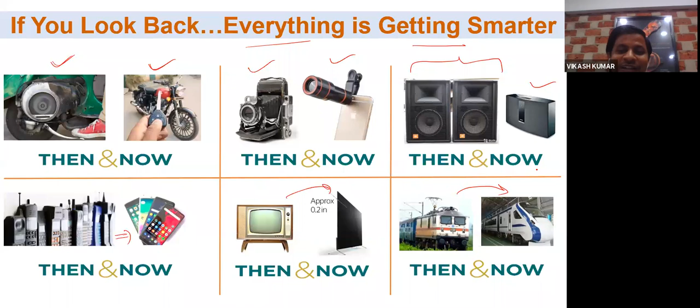So when we talk about everything getting smart, why do we always forget to talk about our industries? If we talk about manufacturing, nowadays manufacturing is not only manufacturing, it is now also known as smart manufacturing. Earlier we were doing only manufacturing with our plants. Now we are trying to do smart manufacturing so that maximum variety can be produced with the same capacity, with the same area. So when we talk about smart manufacturing, it is none other than Industry 4.0.

For that, we have to work. So we started our journey from Industry 1.0, where water and steam power gave very major changes to industry. In the second Industrial Revolution, we have electricity, and people thought about mass production because of this electricity.

When we talk about Industrial Revolution 3, basically automation came into picture. With the help of electrical and electronics, we achieved good automation. Now, if we talk about today's revolution, that belongs to Industrial Revolution 4, which is having one step beyond automation.

When I say beyond automation, it means we first have to go with automation, then we can manage all the things by basically merging our physical world with the virtual world with the help of different technologies. One of the technologies you must have heard of is IoT or IIoT, Industrial Internet of Things. This is one element of Industry 4.0.

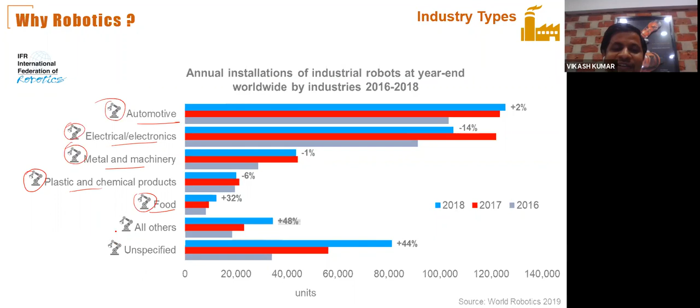There are so many other technologies that are going to play a major role under this. Now, when we talk about robots, you can find these robots present everywhere. If you talk about automotive industry, electrical industry, metal industry, plastic, food, any industry—if you see a picture of any industry, you can easily identify good numbers of robot units installed.

So if I have to cover this Industrial Revolution 4, under smart manufacturing you can find one major technology we have to focus on: robots. Then other technologies are Internet of Things, simulation, cyber security, system integration, cloud computing, 3D printing, big data management, and augmented reality. These are a few of the technologies.

If every industry focuses on all these key elements, all these key technologies, that means we are easily going to upgrade our technologies or industry from 3.0 to 4.0. This is the basic thing we have to work upon in the future. These are some of the latest trends and technologies you have to learn so that our industry can benefit from all these things.

Now come to your opinion. I have covered around 5-6 slides. With the help of these slides, what I've covered—can you say robotics is still a choice for us, or is it a need? If you talk about 5-10 years earlier, I can say at that time robotics was a choice. But nowadays, it is a need.

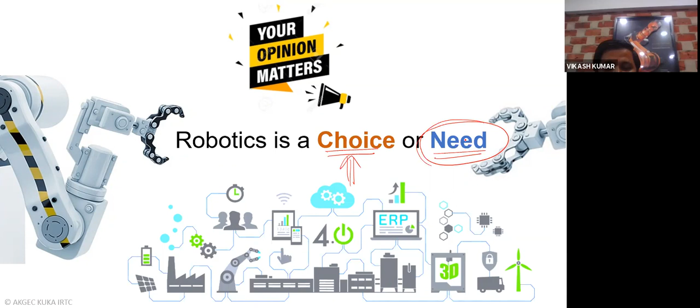You cannot compromise with these robots. Whether you are doing anything, any small thing or any big thing—if you are in production, if you are in inspection, if you are in assembly—you have to use these robotics things. So now I can strongly say robot is a need, it is not a choice for us. We must learn all the in-depth knowledge of these things. So today's session I have planned on robotics.

And if you see the current scenario, this coronavirus pandemic has impacted our manufacturing industry a lot. Here you can say the first impact is on the economy—it goes down. Under coronavirus guidelines, we have to follow this social distancing thing in our production lines.

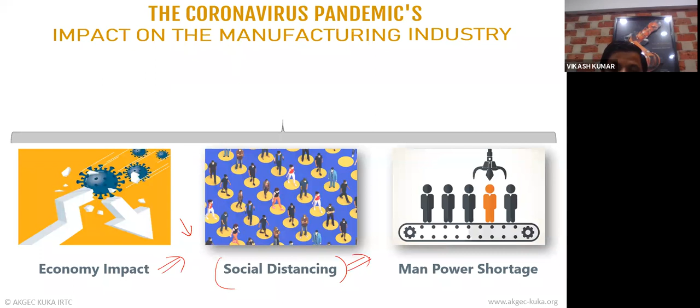Also, we are running into a sort of manpower shortage because every laborer has moved to their native places. So if we have to overcome these three problems—suppose we want to raise our economy, suppose we have to follow this social distancing thing, and suppose we don't want to compromise with manpower or production—there is one solution you can offer to your industry, and that is nothing but a robot, because for machines there is no social distancing kind of thing. And again, machines can replace man up to a certain percentage.

So here you don't have to worry about labor. If you are going with some robotic system in your organization, it will definitely improve your quality and also your production rate. And it is going to increase the graph of your economy.

So these are the few things that you must remember. It is a very growing field. We have to adopt this technology in the coming 5 years, 10 years time.

And why do we go for robotics? There are a few major benefits that it offers. The first and most important benefit that robot can offer is repeatability. If you have to do repeatable tasks, suppose I have to assemble any engine, suppose I have to shift one object from one place to another for an 8 hour shift, for a human being it can be a boring job. But if you are placing a robot at that particular place, it can be easily done.

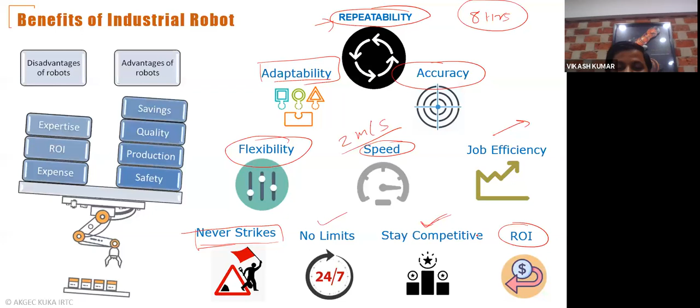And it also offers good ROI, return of investment. Robots are costly, no doubt. But if you are planning robots for your industry for the next 3 years, or if you calculate for the next 5 years your ROI, it has good figures. So you can have better ROI with this robotic arm.

So you have to work with these basic 3 elements. The first element is input - you have to work with sensors so that you can get proper input or feedback. You also have to work with a controller, this is the second element. And you have to work with actuating devices - that can be hydraulics, pneumatic, or electrical. Worldwide, if you see any automation, you can find systems are either hydraulics, pneumatics, or electrical based.

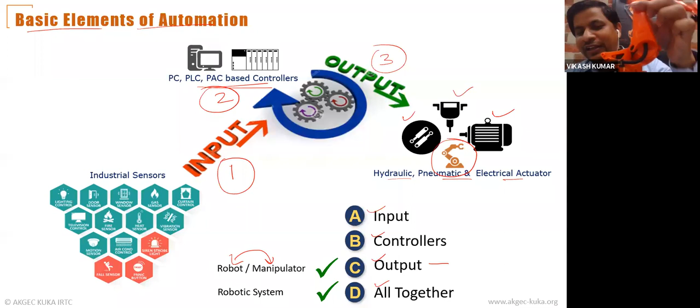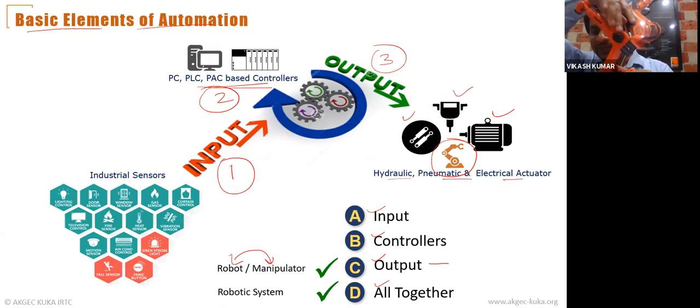If you observe this robot closely, it has some mechanical structure. This whole body, you can say it has some mechanical arrangement. But how am I going to move this particular joint, how am I going to achieve this motion? So I have to place some motor here. Suppose I want to move this particular joint, I require this particular motor. Suppose I want to move this point, so we require some motor at this end. So for each and every axis movement, we require motors. Here you can see, if you just focus on my slide, I'm just giving you an idea.

So basically a robot or manipulator can be electromechanical. We are using electrical principles, motor principles to move our joints. So most of the time robots have this electrical actuation. When we talk only about robot, it can be fit into the output end because it is having some actuation system. But when we talk about the whole robotic system, that is different.

When you are going to purchase this robot, you will get this robotic arm. When you are going to purchase a robotic system, that means you are going to get a few more things. Few more things means the robot will come with their controllers, with their teach pendants. So these are the things that you will get while you are going to purchase your robot system.

So robot is basically giving you some input device with the help of the teach pendant. Control means the robot has its own controller, like KR C2, KR C4 are the series names. For output, you are using some electromechanical actuators. For joint movement, we are using electrical motors. So when this question comes to you, like how we can fit robots - robot can be fitted into the output end, but robotic system can be fitted into all ends together, like input, output, and control.

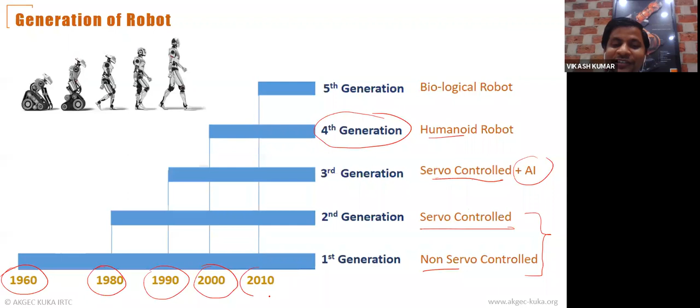When we talk about the fifth generation, worldwide researchers are working on that - biological robots. Biological robots are going to give you miniatures, like robots can produce robots. This is the basic principle. If a robot is producing its own clone, that can be considered a biological robot. So worldwide research is going on with this robot.

But when we talk about industrial robots, industrial robots majorly cover all these first three generations, where we can talk about non-servo or servo plus AI controlled robots. So today's session is basically based only on industrial robots.

And why we are always comparing any robot with human beings - because we have a few similarities. If you see a human being, they have bones for body structure. So for a robot, we have to do a mechanical structure. In human beings, muscles provide power. Suppose you have to move any joint, with the help of muscles only you can move. So in a robot, we are placing motors or hydraulic things or pneumatic things so that it can be actuated.

Humans have some senses, meaning they can sense certain things based on their body tissues. Tongue can sense the taste, nose can sense the smell. There are several things. With the help of that, we get some input. So that can be easily replaced with the help of some sensors.

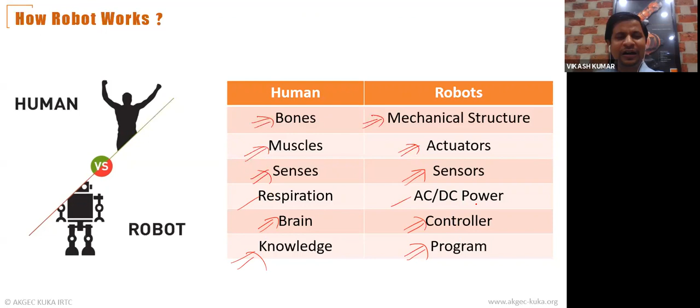Then respiration can be replaced by AC/DC power. Human brain can be replaced by the controller of the robot. Knowledge of humans can be easily put all together in the form of a program. So there are a few similarities you can find between robots and human beings, and because of that, we always compare these things with the robot.

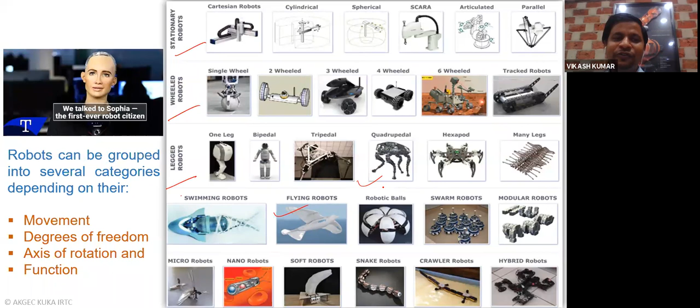So worldwide, if you see, there are some categories: stationary robots, wheeled robots, legged robots. All of you must have come across some robot - some have seen this particular flying bird-like robot. So everyone is well aware of all different types of robots. But if we properly classify this robot, what is a robot? First understand, a robot is a machine designed to execute certain tasks automatically with speed and precision.

If we are getting these things, then we can say that particular device is a robot. So here another definition is given: robots are computer coded software that enables the automation of repetitive rule-based processes, mimics interactions of users, and works across functions and applications.

These are a few basic definitions given by different people. But remember, you have to classify robots into two things: industrial robots and service robots. These are the two major fields that normally cover robot classification. Industrial robots, as the name says, are mostly used for industry. Service robots can be used for domestic uses or professional uses. When we talk about manufacturing robots, industrial robots can be used for manufacturing purposes or logistic handling purposes. So I think you have an idea about automated guided vehicles.

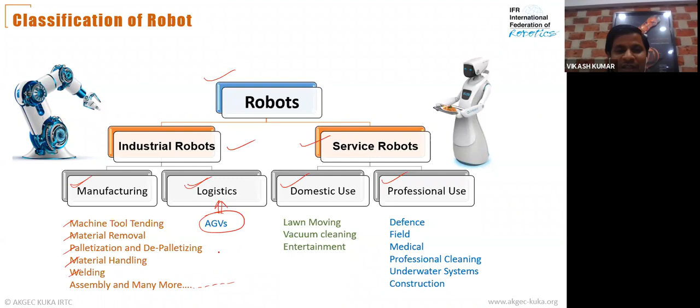That can be used for logistic management, and also we can use robotic arms. If we go for manufacturing industry, there's machine tending operation, material removal, palletizing, material handling, welding, assembly, and many more - many more meaning there is no limit. If you have any idea in your mind, you can easily implement that idea with a robot, because if you go with the robot definition, this is the standard definition that ISO gives.

Robot is automatically controlled, reprogrammable, multi-purpose manipulator. So manipulator is the standard term you must remember. In layman language, people always say this is a robot, but in scientific language, you always have to say this is a manipulator kind of thing. It has 3 or more axes.

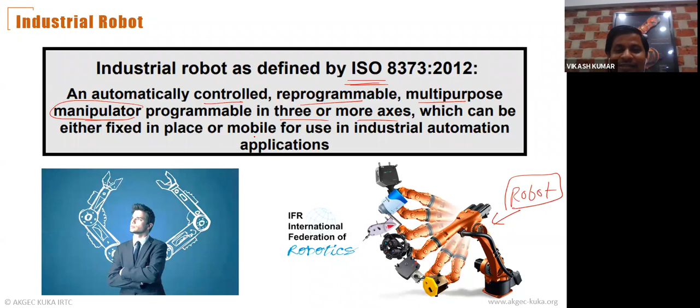If I summarize this definition, I can find these 4 terms. To qualify as a robot, a machine must be able to sense, if it has sensing ability - so I can call it a robot - if it can carry out different tasks, if it can reprogram, or if it has 3 or more axes.

3 or more axes means these axes can have either prismatic or revolute motion. Prismatic means always linear kind of motion, left to right. But when we talk about revolute, it means we are moving in degrees. So displacement is in mm for prismatic, and in case of revolute, we are moving in some degree, 100 degrees, 50 degrees, like that - our robotic arm, robotic joint is moving.

For defining any machine as a robot, if you find all these 4 qualities present under any machine, I can easily designate that particular machine as a robot. So it is very, very important.

So you just compare this robot with CNC. From the last 2 sessions, you are learning CNC in very depth. Now, can we say CNC is a robot? Because can CNC have 3 or more axes? Yes, it is applicable.

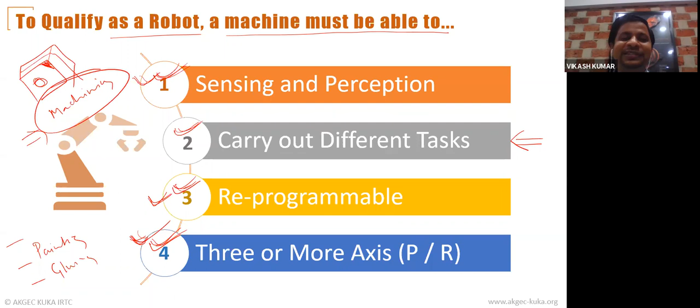If we have to change domain totally, the machining domain can be easily covered by this CNC, but other domains - painting, assembly, even inspection - cannot be covered by this CNC. So this is the main reason why we cannot say CNC is a robot, based on their multitasking property, which is not available with CNC. Thank you.

If you categorize your industrial robots, majorly people categorize them on the basis of geometry or structure, how robots look, or based on their control system. There are more than 10 types of classification available, but these two systems are very famous: classifying based on geometry or control system.

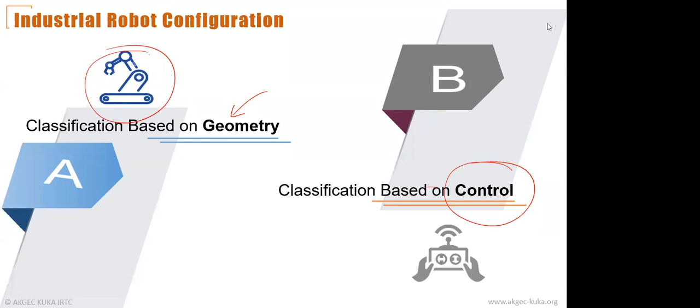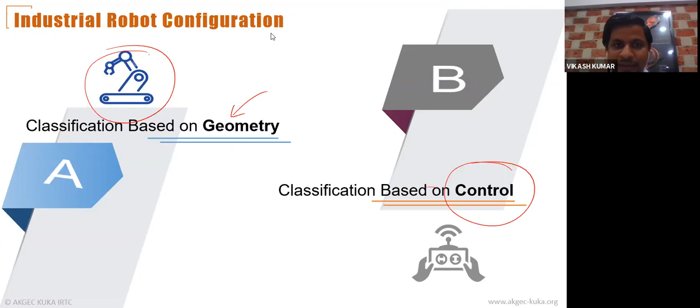So if we classify our robot based on geometry, I can have basically 5 kinds of robots. I can have Cartesian robot, which we also sometimes call linear or gantry robot, because all motions of these robots belong to linear motion. When we talk about jointed arm robot, that is the one I showed you in demonstration a few minutes before, that is the articulated one, having 6 degrees of freedom. It is also known as articulated robot. Robots can be cylindrical, spherical or polar, or SCARA robot. These 5 classifications of robots are very popular in industry environments.

When we talk about Cartesian robot, just focus on this. Cartesian, also sometimes known as rectangular robot, has all linear motion. So here linear, here linear, and here linear—all motions are linear.

When we talk about cylindrical robots, it has one rotary or revolute joint and the rest two linear. Here you can easily identify how the robotic arm is moving.

When we compare with spherical robots, spherical has 2 revolute joints—one rotation, second rotation—and the last one is linear.

When we talk about SCARA robot, double RP means 2 revolute and 1 linear. When we talk about jointed arm or articulated robot, it has all revolutes—this joint is rotating, and this joint is also rotating, so all together we get revolute motion.

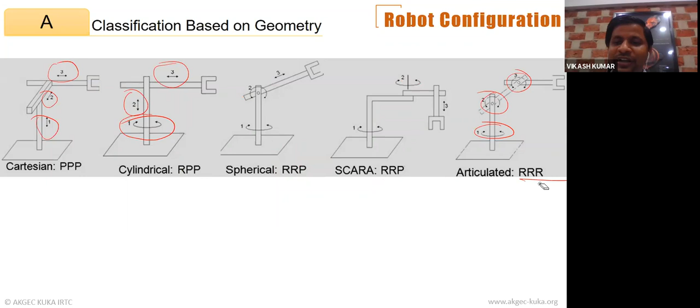So based on this linear and rotary motion, you can classify your robots in different ways.

But if you see, SCARA robots have a double RP configuration, meaning 2 revolute and 1 prismatic. So how can you classify them differently if the joint configuration is the same? How are these 2 robots different?

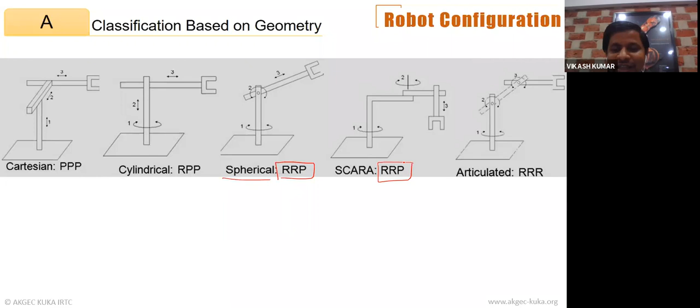If you see their work envelope, the area covered by the robot—for Cartesian, since all axes are linear, we get a perfectly rectangular box envelope area. For cylindrical, we get a cylindrical kind of envelope area. These two robots have similar joint configuration, but their work envelope is totally different—it has some sphere kind of area. Spherical robots have a sphere kind of area they can cover, as you can see in the diagram. But when we talk about articulated, it has the maximum envelope area it can cover.

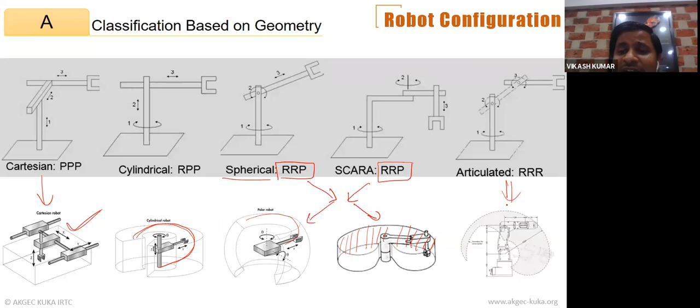That's why articulated robots are mostly used by industries, in a higher percentage—more than 60% of robots belong to the articulated category. Worldwide, if you survey every industry, you'll find 60% of robots placed in industry belong to this jointed arm or articulated category. In second place, you find Cartesian or linear robots, and at third place, SCARA robots. These are the top 3 robots most popular in industries.

So one having pure 3R configuration, articulated, is at 60%. Linear robot has all prismatic, 3P, and around 20% of robots used by industry are this type. SCARA has 2 revolute and 1 prismatic, and around 10% of robots you can find are SCARA. These are some statistics you must remember if you want to work in this domain of industrial robots.

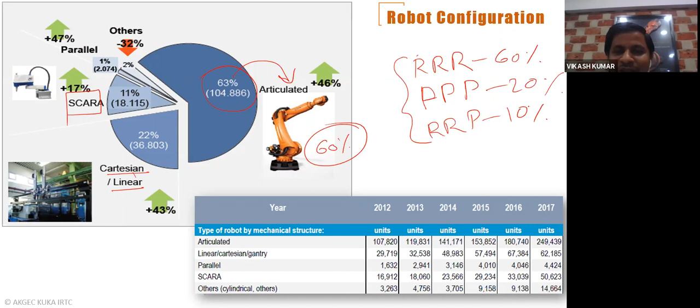So which robot is most popular in industry? You can straight away say articulated robots are quite popular in industry. When we classify our robot based on their control system, we have to remember two things—control system means how we are going to control our motion.

So how are we going to plan our motion and move our robot. Whenever we talk about joint strategy or motion strategy, it means either it is open loop or closed loop. These two systems we have to focus on, whether you want a servo control robot or a non-servo control robot. Second thing we have to consider under motion planning is what kind of path you are going to take.

If you are taking a random path, suppose we have to move the robot from location A to location B and you are not going to freeze the path, it means it can randomly go with any shape. But if I freeze my path with linear motion, it means in a linear manner my robot will move from point A to point B.

In the same way, you can also have circular motion. With the help of this, you can move from point A to point B in a circular or arc manner. So all this knowledge is required while we do our programming.

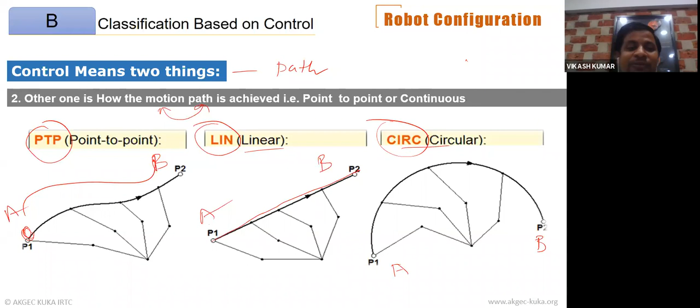Now I'm going to focus on the robot system. So far I have covered robots in detail - what is the definition, what is the classification, and what are their major advantages. These things I have covered.

Now suppose you want to program your robot with the help of some manipulator - how are you going to program it? First you have to understand what a robot system is. As I told you, robot means robot can be this image you see at the top right corner - this can be a robot. But when we talk about a robot system, this is our manipulator, and you require a few more components other than the manipulator.

The second component you can see here is the controller. Controller must be there if you talk about robot system. The third system, used for input purpose, is known as the teach pendant or smart pad. With the help of that, you are giving some instruction to your robot.

The instruction that you provide with this teach pendant is not directly fed into the robot. First, suppose you are there and you're having this teach pendant - so you instruct this teach pendant, which will go to the controller, and this controller will go and communicate with the manipulator. So when we talk about this robotic system, it must have a robot, it must have a controller, and it must have a teach pendant, or you can say input device.

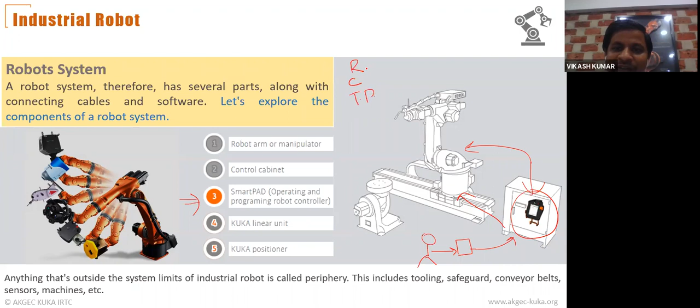These three components are very, very essential, but sometimes you also have to consider this linear unit. Linear unit means, most of the time, this robot can be fixed to the ground, but suppose I have to work here at another table - how can I move this robot? For that, I have to install some linear axis, on which this robot is mounted, and it can travel from one place to another place. So the linear unit is another major component of any robotic system.

Last but not least, here you can see some table arrangement. Suppose you have to perform any task, you require some table arrangement. With the help of that, you can easily assemble the part or component that you are planning. So the table is again one thing.

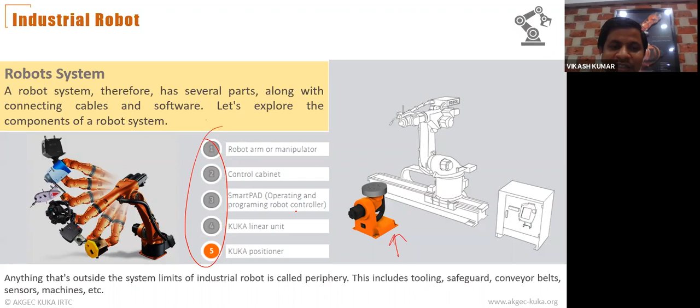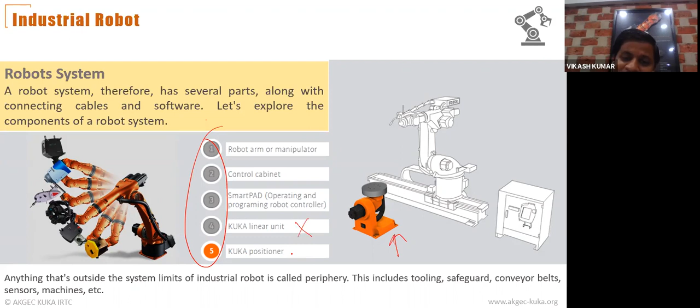So what have we learned with this robotic system - here you can see all these 5 things are essential components while you are using a robot for any application. You must have the robot, you must have to handle the controller, you must have to handle this smart pad. With this linear unit, you can compromise, but you require tables. So these are the components that we normally have to use with robotic applications.

And if you further break down your robotic arm, you can find a few more components. Just for your knowledge, the base is known as the base frame - this particular unit. Then just above that, we have the rotating column. Then in vertical format, we have one arm that is known as the link arm, and horizontally we have another arm that is also known as the wrist arm. So three things you must remember: rotating column, link arm, and wrist arm.

So I am going to demonstrate all these things with the help of a model. Just wait for a minute.

So focus on my video. This is your robotic arm. Suppose I'm having this robotic arm. This particular base where I hold this robot, this black portion, this is your base frame. And this particular unit is known as the rotating column, because first of all, the robot starts rotation from this.

Vertically, after the rotating column, we have two things. One vertical one is known as the link arm. And this other one, horizontally, is known as the wrist arm. This black portion is the base frame, and this rotating column you can find just above the base frame and below the link arm. So these are some important components that you can find in the robot itself.

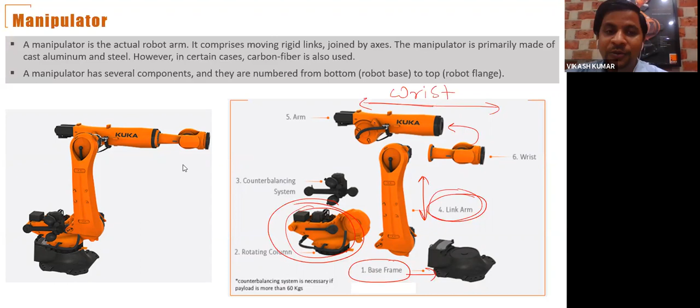Suppose I have given axis 1, the A1 axis, and I want to move 120 degrees, and the robot compares its current position. If it is at 119 degrees, then 1 degree more is required to feed. So for that, some feedback system is there, so that ultimately you achieve this 120 degree position with any axis.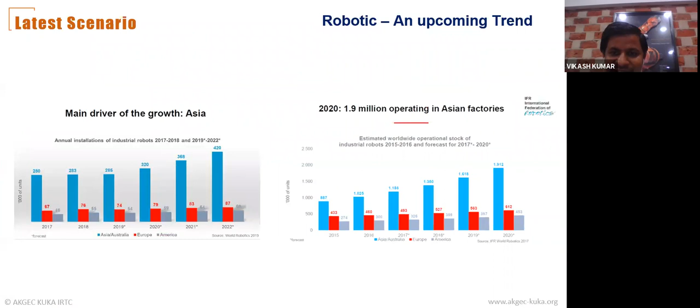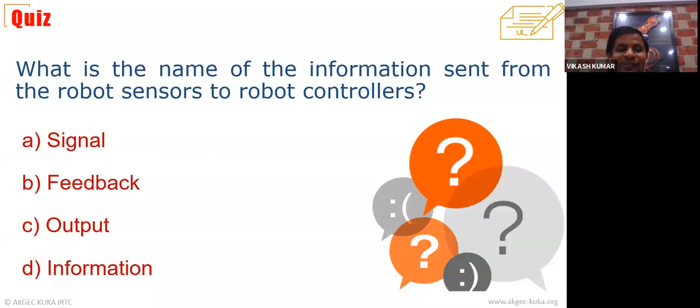Moving to the next question: what is the name of the information sent from the robot sensor to the robot controller? Just use your mind. Suppose you have to send information from the robot sensor to the robot controller. So is it signal, feedback, output, or information? If you have seen my last architecture slide carefully, you can easily answer. You have to work with this feedback mechanism.

This is a very important part, because at the end of today's session, each and every participant should be easily capable to produce their own program, to understand how robots can be programmed. For that, the essential things are: first you have to understand the robot, then you have to understand the robot system, and then how you identify that particular robot - robot selection is a major criteria. So these are the few things that you must remember.

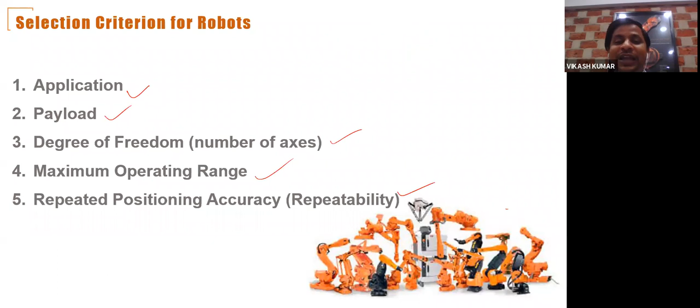In the same way, suppose you are planning a robot for your manufacturing plant. You have to correctly identify the robot based on their application, load carrying capacity, degree of freedom, maximum operating range, and repeatability. These are the top-notch criteria. There are a few other criteria also, but you must work with all these five criteria - you cannot compromise on any criteria here.

If we talk about application, it means whether you are going to use your robot with wall mount. See here, the first two robots - this robot is wall mount, then this is rail mount, on a linear track it is moving, sliding, or it can be AGV mounted - at the bottom we have automated guided vehicle, and with the help of that we are placing the movement of this robot. On top we have roof mounted robot, so you can hang your robot in this way also. So in this way you can select your robot based on which type of placement you want.

Then second criteria is how much load you want to handle. Suppose this robotic arm has a small payload capacity of 3kg. Robots always have some numeric designation - suppose I'm designating this KUKA KR16 robot. KUKA is a make, there can be other makes also - Fanuc, ABB, Motoman, Yaskawa - robot manufacturers worldwide, you can find so many manufacturers available. So K stands for KUKA, R stands for robot, 16 stands for 16 kg payload. With this robotic arm you can carry up to 16 kg load from one place to another without compromising repeatability and accuracy.

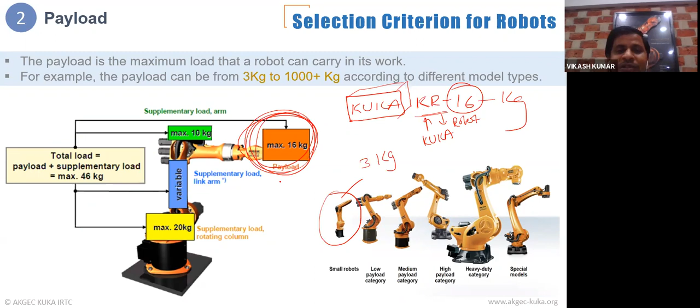If you go beyond this 16 kg - suppose you purchased a 16 kg payload capacity robot and use it for 30 kg work - it will work, it's not going to deny your task. But after some years you will see repeatability issues. So if you want to do tasks with very high repeatability and high precision, you must obey this basic fundamental: don't go beyond the payload capacity of the particular robot.

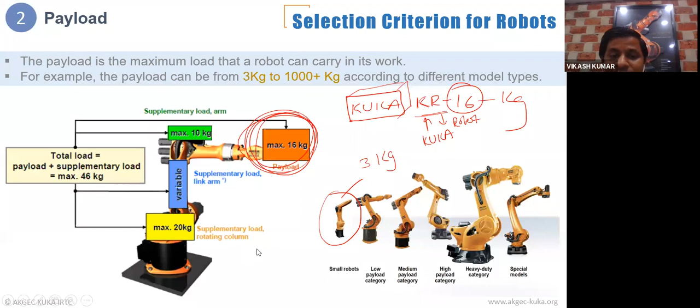If you see the number of axis, the model I presented has a 6-axis robot, so 6 joints are there. In the same way you can see number of axis can start from 1 axis and go beyond 6 axis also. These are things you must remember - with how many axis you can easily manipulate your work, because as you go higher, say from 3 axis to 4 axis, it adds some additional cost.

So for each and every axis, you have to pay additional cost also.

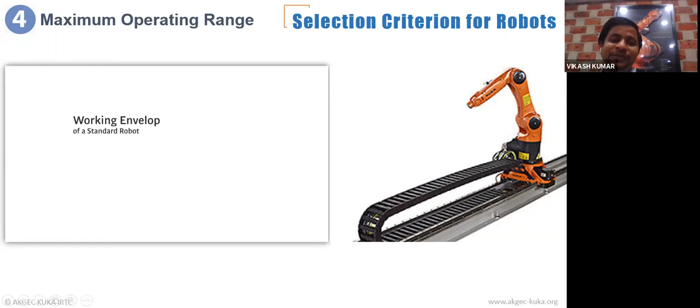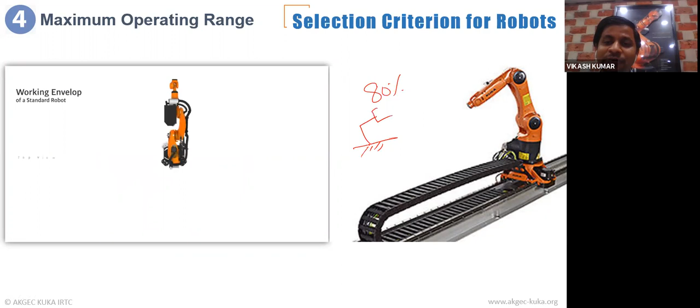Next criteria is the operating range, meaning how robots are going to work. This is the work envelope developed by a robot - how much volume it covers with its surroundings, because in 80% of applications, robots are fixed. Suppose this is my robotic arm, it's fixed at one place, so we have to take care of the area where it can work or cannot. In some cases, it can move on a linear track also.

The last criteria to remember is accuracy and repeatability. You must buy a good accuracy robot - it can come with 0.06 mm repeatability down to 0.01 mm repeatability. Suppose I'm using one robot for MIG welding application, and with the same robot I try to control a laser. We are not going to get high repeatability here, because if it doesn't have very good repeatability, it cannot be used for laser. For laser, we require a very high accuracy robot.

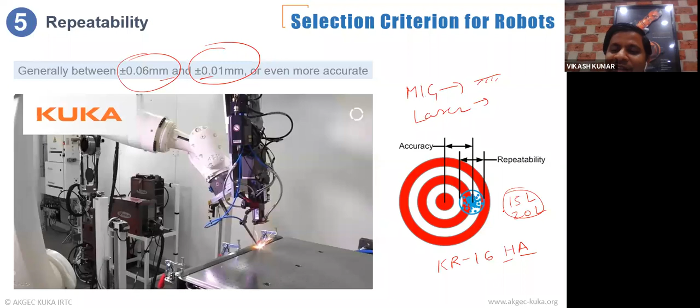Whenever you buy a high accuracy robot, after the model name like KR16, you can find an abbreviation like HA, meaning high accuracy. Suppose KR16 comes with a price of 15 lakh rupees - if you go for the HA version, it will cost nearly 20 lakh rupees. So it adds some cost also. It all depends upon your application, whether you require that kind of accuracy or not. If that is not the major concern, then you can go for generic robots.

As I said, there are so many other criteria.

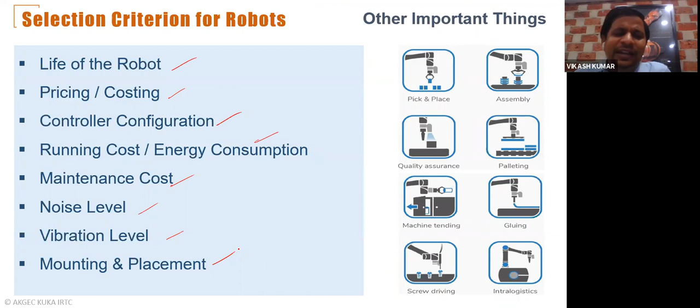So these are a few other criteria. Based on that, you can also select your robot.

Now coming to the interesting part of this session - how we are going to program our robot.

Worldwide, people program robots mainly by two methods: online or offline. The online method has two categories, and you can see here these are the two ways of programming your robot online. In the first method, known as the teaching method, you have to program your robot with the help of a teach pendant.

The second case is the playback method. This means if you want to move your robot, with the help of your hand you can easily move it, and it is going to store all the points. These robots have inbuilt force and torque sensors in their arms, and some memory with each and every axis. Suppose by using this playback method, I am moving one robot from A to B along this path - it is going to store this path. How does it store this path? It has some mechanism based on that.

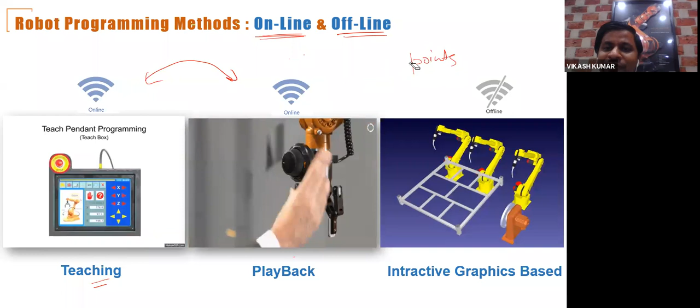Basically, in 1 second of time, it is going to store around 40 point coordinates - finding 40 points along this line in 1 second. All this point and coordinate data is stored with the robotic arm, with the robotic joints. When you play it back, as the name suggests, whatever motion you gave to your robot, you just have to move it once and it stores that particular path. How does it remember? Based on its coordinate point storage capacity.

But the major drawback with this playback method is that you can only handle a small size robot. In industry, you can find robots up to 10 feet size, or 5 feet, 6 feet size - so you cannot use this playback method with a huge structure robot.

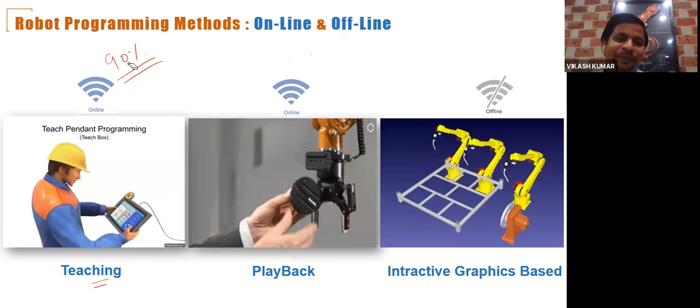If I give you a percentage comparing these two things in the online category, most of the time you'll find 90% teaching method is used, and 10% with this playback method. For playback, no skills are required - straight away you can jump from your chair and start programming. There's no skill required for this method, but you cannot handle much application with it. If you want to program with the help of a teach pendant, which is mostly used by industry, you require some skills that I am going to cover in percentage in today's session.

In today's session, I will discuss that also. My major focus today is to give you some idea about teaching, how we have to teach robot, how we have to program robot with the help of teaching.

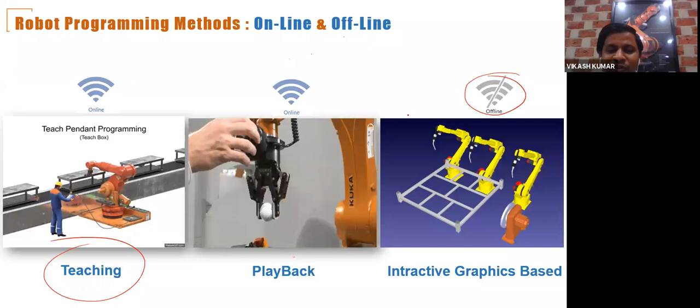There is one more category, offline programming method. This is available with, I think, each and every field. So you have to simulate your things. Suppose virtually you want to simulate and identify whether collision is happening or not, whether robots are colliding, height of the robot, distance between two robots, reachability of the robots are perfect or not. So you can use this simulation environment. For each and every make of robot, they are providing different kind of simulation software.

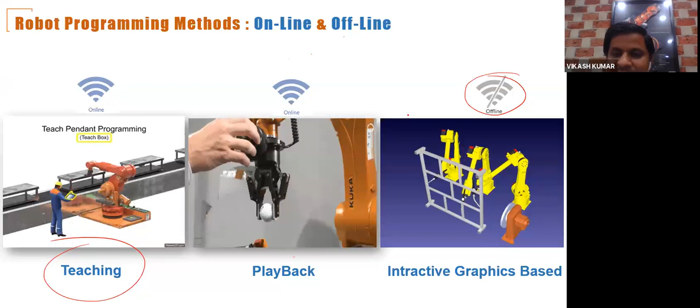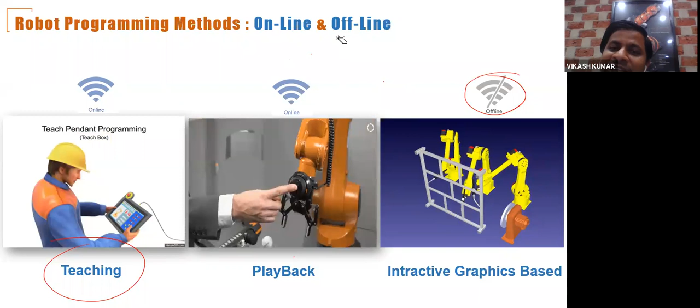Suppose you want to work with KUKA, they are having KUKA SimPro. With the help of that, you can create your offline program, and that program, in your virtual environment, you can plan certain things. So the same code can be transferred into the real world. Only the condition is, each and everything in this layout should be same in the real world. If the placement of your robots and the height of your robots does not match with your real world, it means you are going to have some accident.

So most of the time people prefer this online method, but if you see the advantage of offline, it is having huge advantage. You can easily create your cell - this is real life cell, real world cell, and this is virtual cell. The cell construction takes like 6 months to 1 year time while you are working with actual installation, but it can be done in 1 hour time also with the help of some simulation software. There is no need of installation and commissioning. You just have to pick and place the robot, conveyor, any other components.

So here, suppose you want to change anything at the last minute, you can easily do it, because we are in simulation environment. Suppose I want to place this particular yellow robot at this corner - I can easily do that by just clicking, it's a matter of one click. We can animate our thing and we can see whether these robots have proper distance or not, whether they are colliding or not. So every critical parameter can be checked.

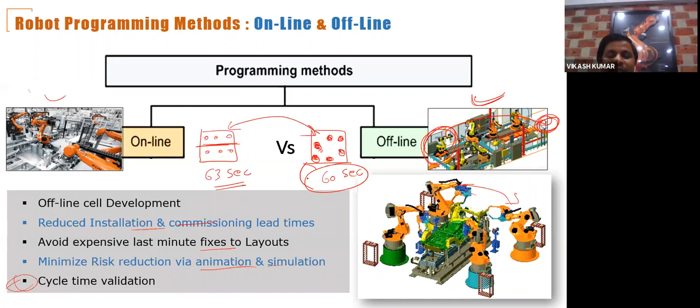If suppose I'm running this simulation for this layout, suppose it is taking 63 seconds for production of one product. And this other layout is giving me only 60 seconds. So it means I'm going to choose this particular layout for my shop floor because it's giving very good cycle time. So these kind of checks you can easily do with the help of robot simulation systems.

For online programming, as I said, you require this teach pendant. Teach pendants can be of different types. As engineers during your studies, you must have used scientific calculators - either it can be FX100 or some different model like FX991. In that way, for each and every robot, manufacturers are providing different kinds of teach pendants.

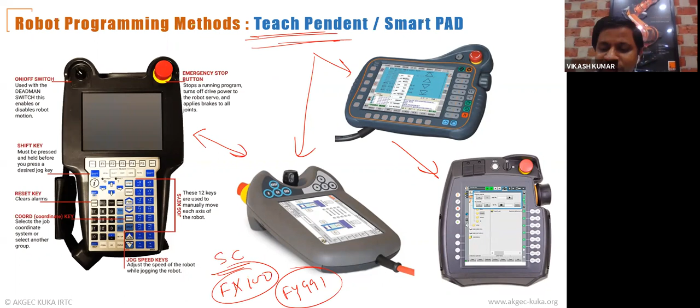But the ultimate goal is, with the help of this teach pendant, you are providing input data that can be processed to the controller of the robot. So here I have one very good question. Suppose you are having an industry where 100 robots are placed on the shop floor. So how many teach pendants are required for the entire production?

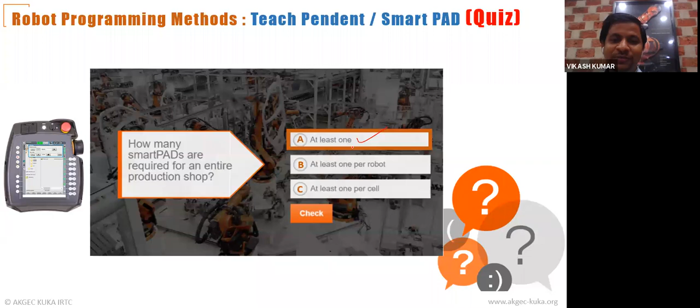Now it's time to learn a few more things. There are good numbers of companies producing industrial robots. It can be KUKA, the famous one I'm just taking. It can be Staubli from Germany, Comau, Fanuc, Mitsubishi, Motoman, Nachi, Panasonic, ABB, Adept. So there are so many companies involved in production of industrial robots.

A few years back, one Indian company started production of industrial robots. So this is an Indian industrial robot. Name of this company is TAL, Tata Automation Limited. They started the first kind of their industrial robot. Nowadays Indian people are working on this robot so that the bulky structure can be reduced. There are some drawbacks with this robot, but if you see the accuracy and other things, it is good. But if you compare TAL robots with Fanuc, KUKA, you can find they are taking more space and not having that much speed that we can achieve through Fanuc and KUKA. So there are a few drawbacks, but people are working day and night to overcome these things. The good thing is that we have started production in this domain also.

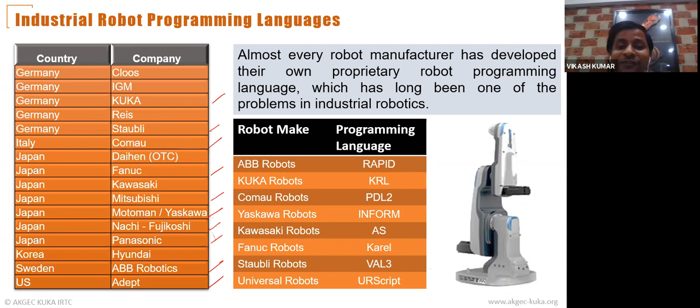So how can you start learning with these things? One thing is common. If you want to learn this programming, in all languages you can find one common thing: all languages are structured programming languages.

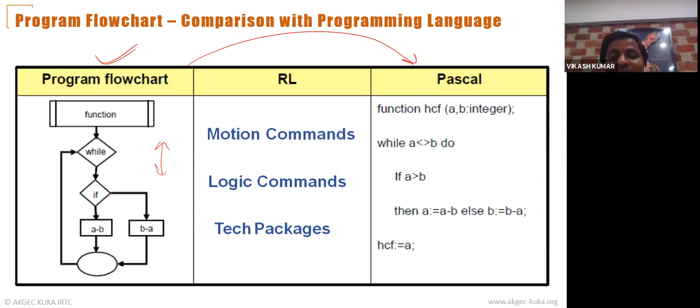So in that way, when we talk about structured means, you can see here structured always means this one. If you are having some idea how your program is going to flow, like how you are going to start your logic, that logic can be converted into any language. It can be ABB robot language, Fanuc language, Pascal, KUKA robot language, C++, any language. If you are good enough here, if you are logical here, you can easily convert that logic into any language. That is a matter of only a few days of learning.

But when we talk about robot programming, these three elements are very important. Apart from logic, how you are going to control your motion commands, how you are going to provide some logic, how you are going to provide these tech packages. If you observe any program, you can find all these three components are there.

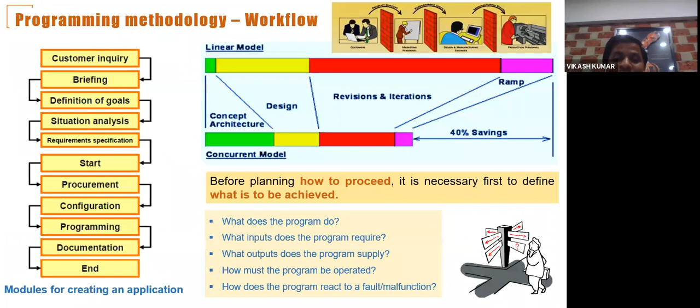If you are following the thumb rule of any language, your program must be efficient. This is a normal demand. Suppose I'm hiring you as a programmer, so what is my expectation? You must produce an efficient program.

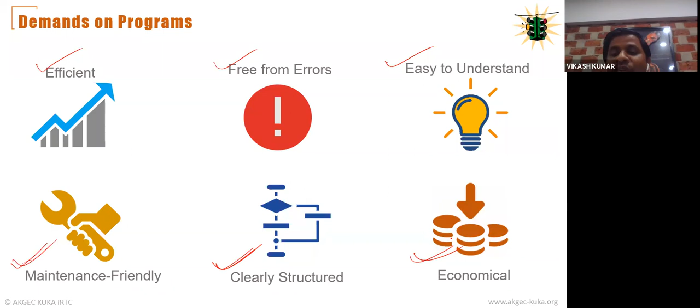You must produce a program free from error, a program that can be easily understood by anyone. It should be maintenance friendly, clearly structured so that changes can be made, and also economical. Economical means a program can be written in a way that takes few minutes, or in the same way, a program that can take few seconds. So we have to control our language so that cycle time can be optimized.

Before going to apply your program on a robot, you must take care of robot safety. Robot safety is very, very important. These are some operations that you must remember.

You must know how we can move the robot, suppose in plus X, minus Y or plus Z direction. You must be easily able to manage all these directions. Only then can you plan your robot for any motion.

Mastering is a kind of reference, so you must set your reference. Suppose in case of a CNC machine, we have to set X, Y, Z to 0, 0, 0. In the same way, for each and every joint, suppose I have a 6 joint robot or 3 joint robot, for all these joints I have to set a certain reference. With that reference, I can move my robot from one point to another point.

After this, you have to take care of your tool also. Your tool should be calibrated, your base should be calibrated, your robot should be calibrated. So all these references we have to set. Calibration means we have to set robot joint references, tool reference, and base or workpiece reference.

If you are good enough to handle all these 5 operations, you are straight away ready for programming. With the help of this, we can program our robot. When we talk about motion command, what are the elements you have to consider under motion?

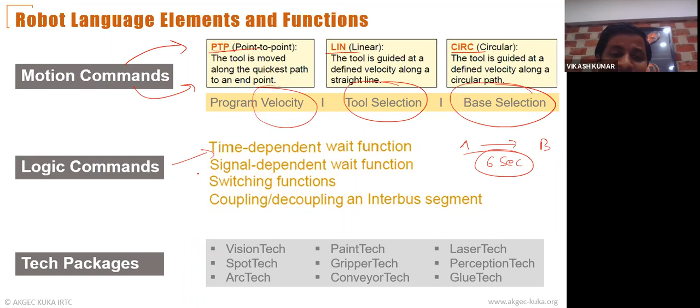So we have to take care of these logical commands also. In tech packages, suppose you are working with robotic vision. With the help of robotic vision, you can easily work with the teach pendant where vision related inputs will be asked. Suppose I am handling this ArcTech.

Suppose I have installed ArcTech under my robot. It is directly going to ask what kind of rating you want for your welding, what current you want, what is the wire feed rate, what is the gap between workpiece, and all these parameters it is going to directly ask. Otherwise, you have to work in depth also. So the HMI can be easily converted based on your application so that you can easily give your inputs.

So this is the way, it can be PTP, linear, or circular. When we say logic commands, it can have different loops also. For loops we can apply as in C, in the same way while, repeat, loop. These are the few logical commands that we can do.

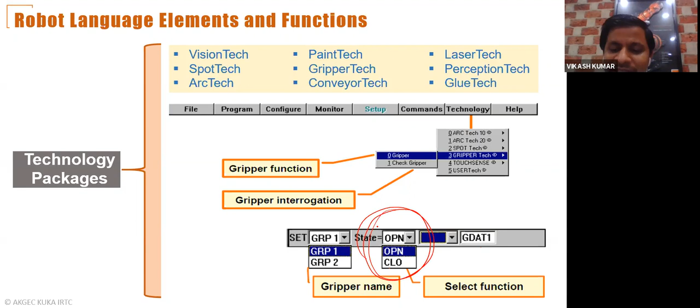Technology commands, like in case of a gripper, we always require this gripper to open or close. How can this gripper tech be installed? You just have to install one exe file, and with the help of that, this particular thing starts appearing in your programming line.

So this is the basic structure. I am going to introduce each and everything here, all these 3 things. First was my motion related thing, second was my logic related thing, and third element was my technology package related thing.

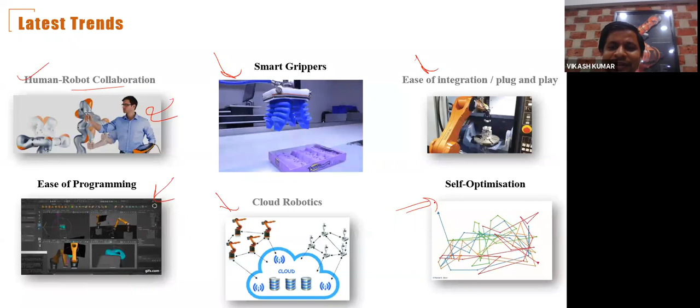In earlier days, robots had a defined area in which they worked, and operators stood outside that particular cell. After that, robots worked in their envelope and human beings worked in their envelope. Now, in the latest time, they are sharing a common area. This is known as the cobot principle, where humans and robots work together sharing a common area. Many research efforts are going on in this area.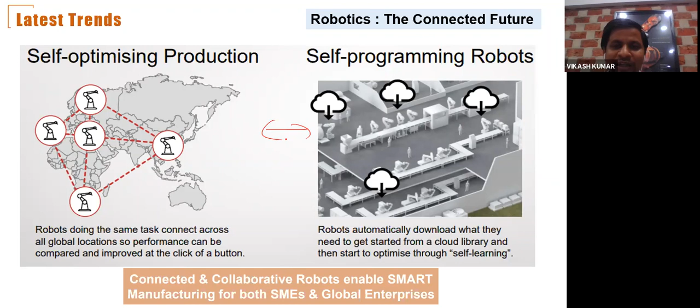Cloud-based robot operations are also going on, this is one latest area where you can work. Because of space limits, people have started working with small miniature robots. These robots can easily be fitted into a 600 by 600 area. So small robots are available nowadays in the market, so you can opt for this robot where space is a major concern, going with a small size robot.

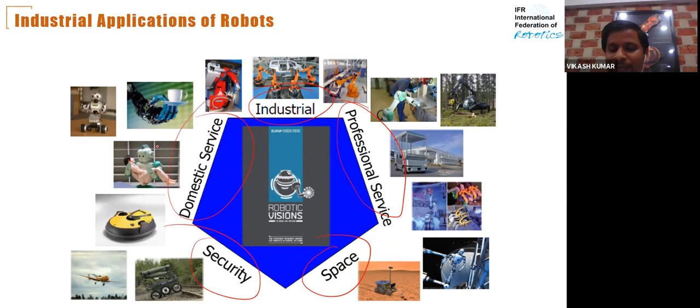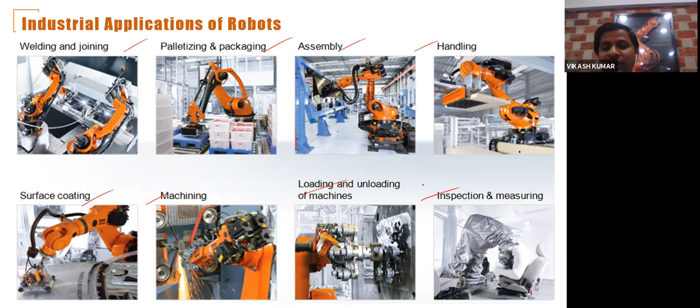When we talk about application, in general, robots can be used for industry, professional use, space purposes, security purposes, and domestic purposes. But since today's session is purely based on industrial robots, industrial robots can be used for joining, packaging, assembly, handling, machining, surface coating, loading, unloading, and inspection. These are a few applications where industrial robots are already used, in wood industry, aerospace industry, medical industry, building, metal, entertainment, machine tool, machine tending, printing, and injection molding. There are so many fields where robots are used.

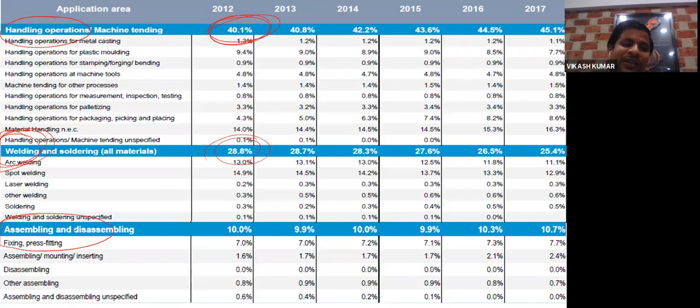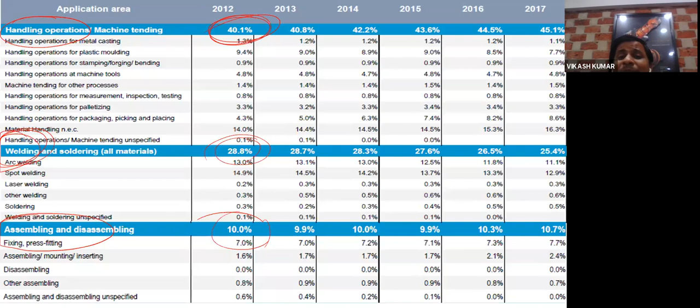If you identify the top 3 applications of robots, handling operation always comes at number 1, more than 40% of applications done by robots are related to handling. At second place, welding is majorly covered by industrial robots, around 30% of robots are used for welding. At third place, assembly operation, around 10% of robots are used in industry for assembly purposes. So handling, welding, and assembly, these 3 applications are majorly used.

We also have robotic machining. With the help of this robot, we can machine any structure, create a sculpture, create dies, so milling can be done with the help of this robotic arm. Robotic deburring operations can also be done with the help of this. These facilities already exist in our campus.

We can do ultrasonic welding, robotic 3D printing, robotic laser, force and torque sensor kind of things, automatic tool changing kind of things, and robotic spot welding.

We can do robotic tandem wire welding, also called twin wire welding. Here the weld deposition rate is very high, 30 kg of weld material can be deposited in 1 hour. So twin wire welding can be done, and this is available with us.

We can also do CMT welding. With the help of this CMT, we have started working on WAAM. WAAM is a very hot field, and good research is going on in that.

Wire arc additive manufacturing: we don't have to depend upon metallic 3D printers for manufacturing. We can directly use a robotic arm with a controlled welding power supply. Here the power supply is CMT, cold metal transfer technique. With the help of this robotic arm, we are producing good parts.

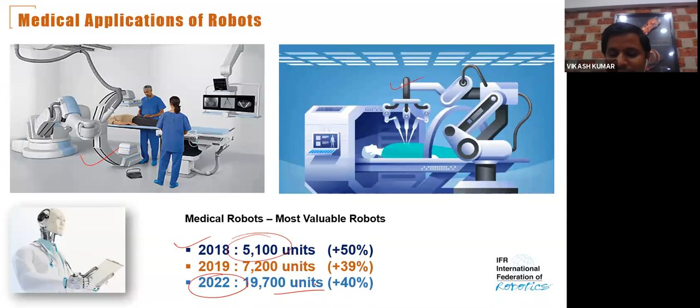We are also doing good research in that. And robots are not untouched by the medical industry. Many robots are used for scanning purposes, industrial robots for operations, and other purposes too. In 2018, about 5,100 units were sold, and it is predicted that by 2022 we will sell around 20,000 units worldwide in the medical industry.

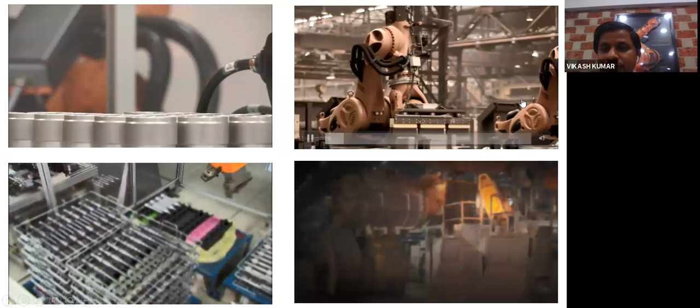If you see different applications, here you can see a dual acting gripper is used. At the same place it is doing inspection and material handling, and at the same time it is loading and unloading.

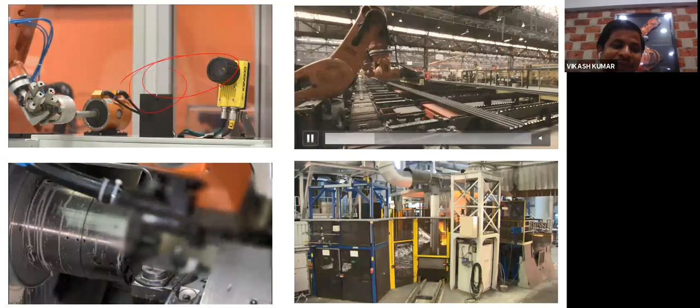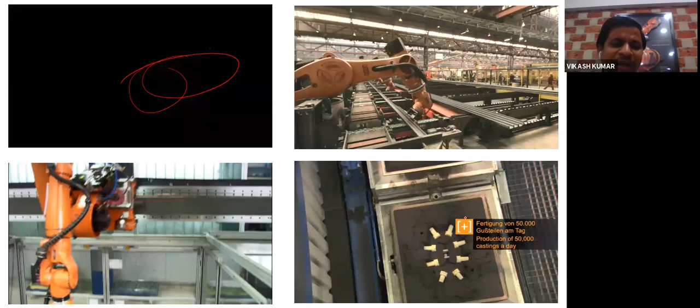Here you can see a huge assembly handled by a group of robots. On a linear track, our robot moves and does operations. In a forging shop, we can mount robots so that heterogeneous operations can be done. If you just Google industrial robot application, you can find n number of applications.

See here, near a furnace it is working. We have covered the robotic arm with some heat resistant material. So welding, casting, all these critical applications can be done with this robot. You can find a good number of applications with each and every robot.

If you see the job opportunities, there is one survey done by the World Economic Forum. By 2022, over half of all workers in India will require reskilling to meet the talent demand of the future. Suppose we want to reskill ourselves - why? Because there are good job opportunities present in the robotic domain.

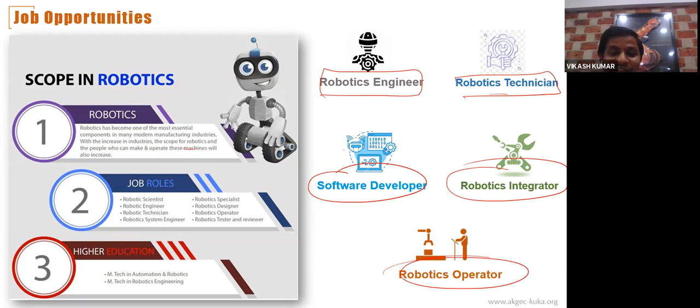After learning these things, you can become a robotic engineer, a robot technician, software developer, integrator, or operator. All skill set jobs are available in the field of industrial robotics. Kindly motivate your students and other faculty members to promote this technology among students so they can have some idea about it and easily fit into the upcoming Industry 4.0 environment.

When we talk about SCARA, it has 2 revolute joints and 1 prismatic joint. What is the best characteristic of an industrial robot? If you remember my words, it's repeatability - this is the best feature we can have with a robot.

The most popular application, as I've covered - in the top 3 applications, material handling is the best operation, covering around 40%.

So to conclude my session, if you want Indian industry to become world class, automation and robotics technology will play a key role in that. We all need to be geared up. So that's all from my side.